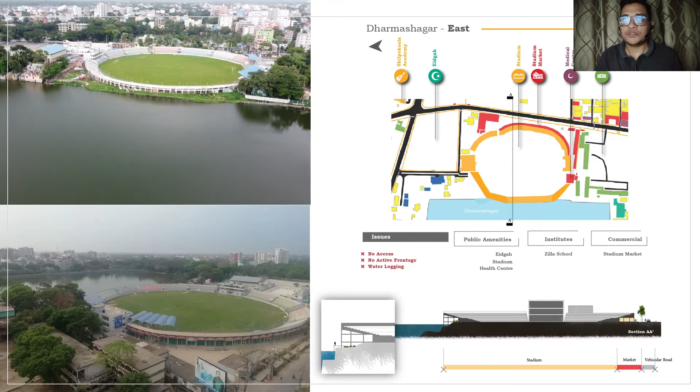From the beginning, the central recreational zones of the city were developed based on the east bank of this water body, which by the time was divided and converted into a stadium and central Idgah. The north bank can be defined as the administrative territory of the city.

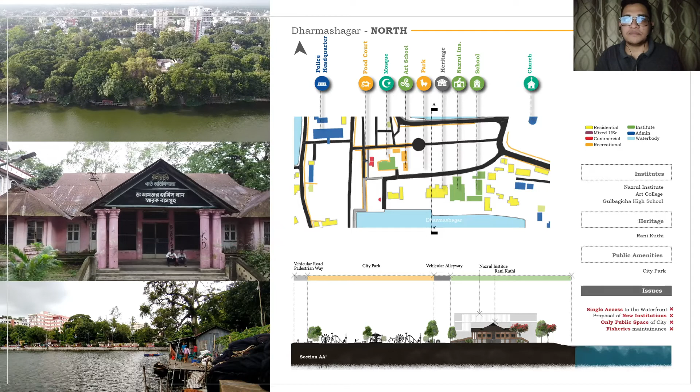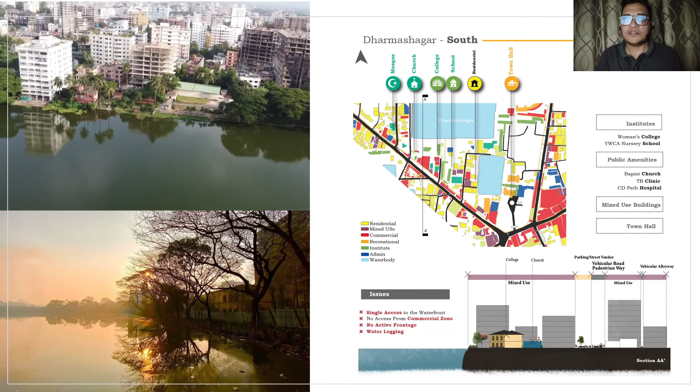A walkway developed beside the west bank is the only public open space of the city. The south bank is completely blocked by private residential blocks. Unplanned development and interventions have backfaced maximum peripheral areas of this site.

From the beginning, Dharmashagar has been the center of several cultural and religious activities. Over time, these activities changed their shape. Several public institutions developed without any consideration. There are some infrastructures built during the British Raj which have lost connection to the water body over time.

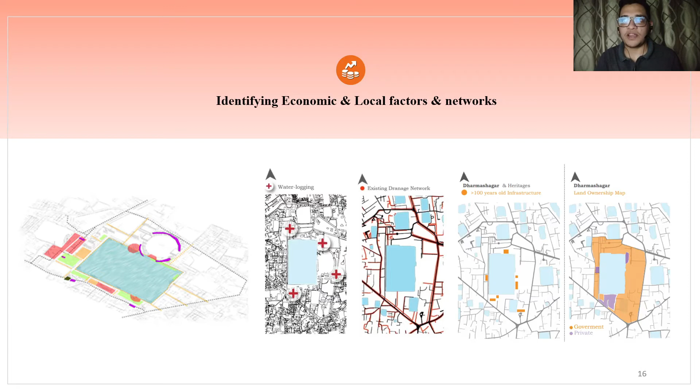The economic growth of an area depends on its accessibility, proper placemaking of commercial or other amenities, and prevention of existing problems. From the physical survey and user interview, we tried to understand and find ways to develop a fluent accessibility network that will complement finding a proper drainage and water retention system.

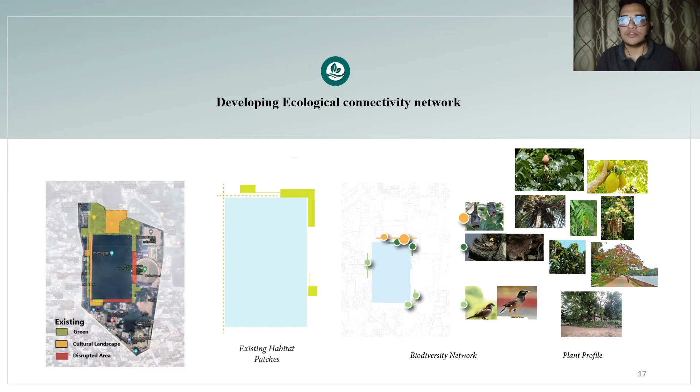As Dharmashagar is a massive blue infrastructure standing for the last 6 centuries, it holds an ecological system of its own. Over time, it has been disrupted in many ways. Here we tried to find out the existing ecological patches which may be conserved and connected through ecological corridors and tools to restore their significance.

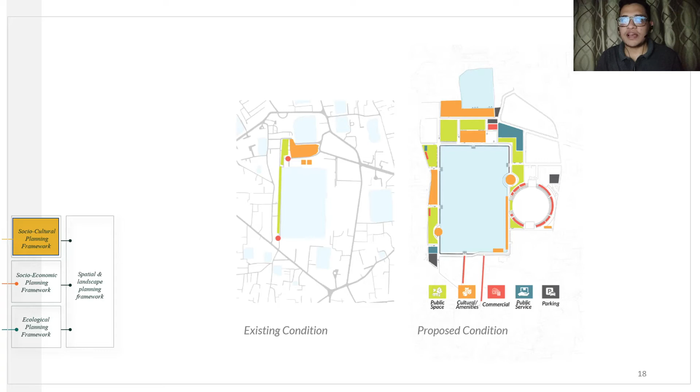This water body holds an approximate 1.5 km periphery, connected to several individual neighborhoods. As this holds the only public space of the city, we try to maximize the area of it. Existing historical landscapes are preserved, and public amenities are placed to satisfy the activities of these public spaces.

The small local businesses based around the Dighi are not planned or coordinated, resulting in loss of potential growth. Pathways and drainage networks have been proposed to improve and connect the commercial zones with their surrounding public activities and local stakeholders.

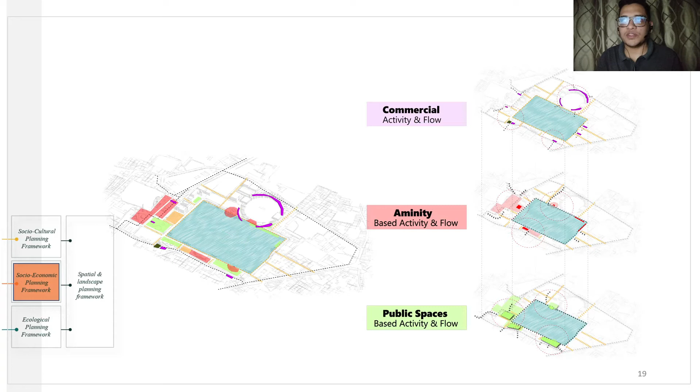Some distinct layers were determined by analyzing the survey data. The elements of creating a biodiverse system are present but scattered and waning. By protecting and improving the present condition, and connecting them with proposed tools and policies, an effort has been made toward sustained biodiversity.

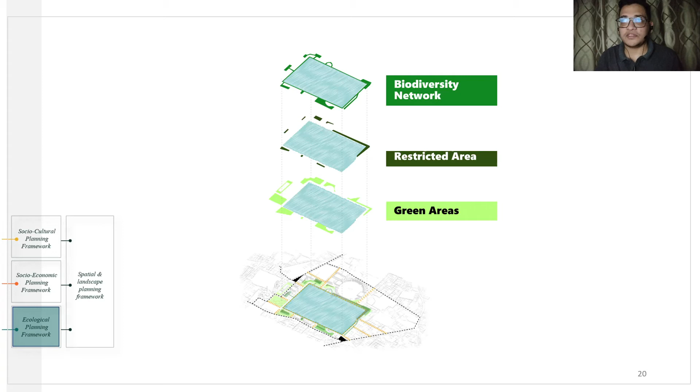The proposal intends to provide a guideline for future spatial uses of the Dighi surrounding. The preliminary design framework ensures multipurpose use of this Dighi surrounding, which protects the cultural and ecological values. The framework considers a minimal footprint in the existing landscape, based on 3 clusters of intervention which will facilitate local neighborhood and general users.

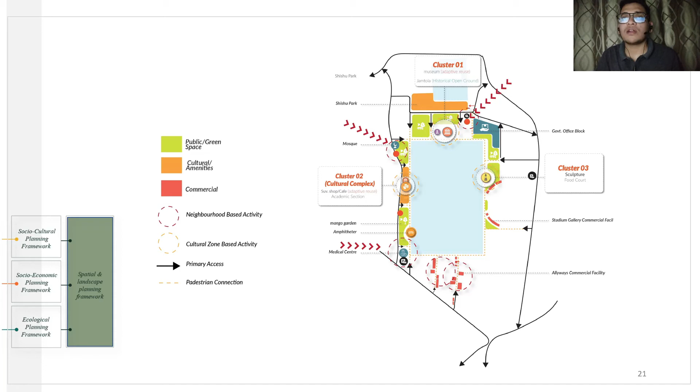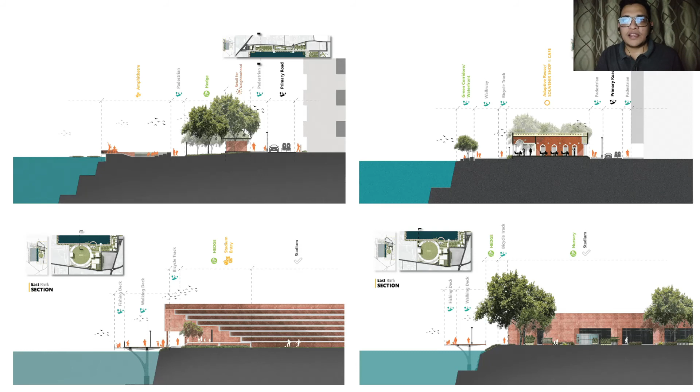These proposed sections show the generative responses towards the water body, considering neighborhood needs, public desire, environmental factors, and historical significance. In the design proposal, biodiverse areas will be protected by creating a green network. Each point of intervention has been identified and carefully analyzed to determine specific environmental conditions, user base, and traffic volume.

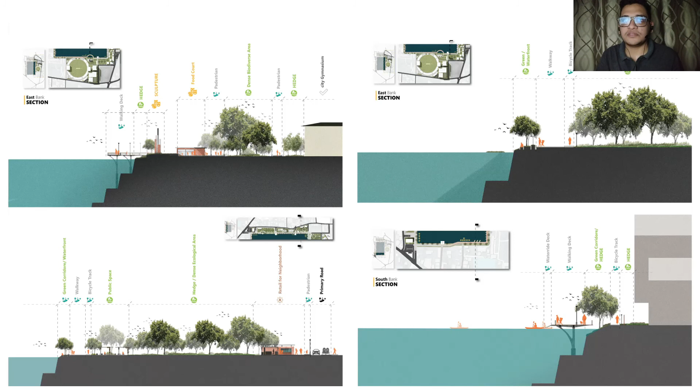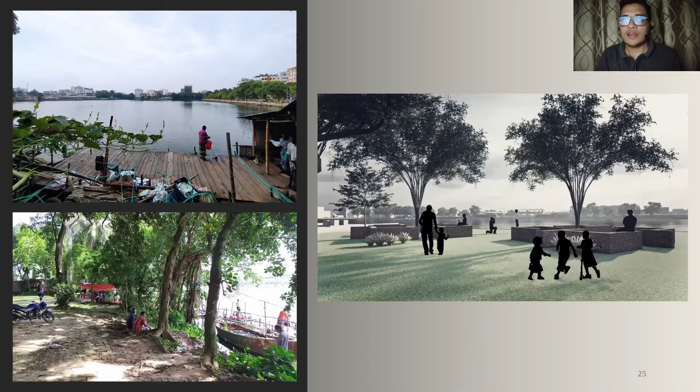This study analyzes the socio-cultural, socio-economical, and ecological values of Dharmashagar and its surroundings, which are worthy of preservation and exposition. As an outcome, we can evaluate the scopes of sustainable development, a summarized description of the spatial structure of a Dighi, and the common heritage values that we may find in other water heritage as well.

The achievement of the study not only helped to realize the importance of protecting this valuable water heritage, but also serves as a sustainable solution. Thank you, everyone.